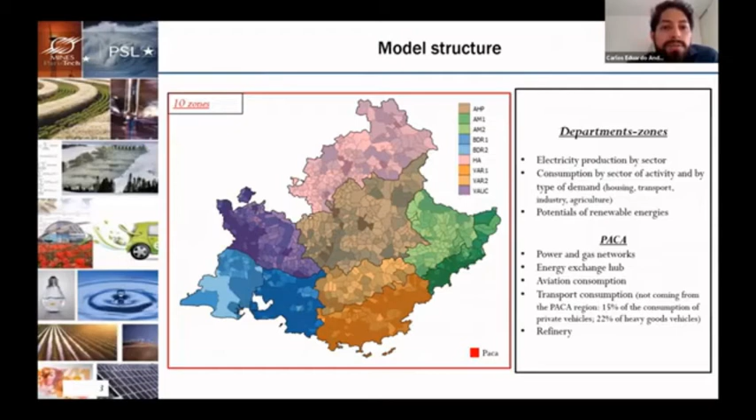Also, we want to represent in this region some of the demand on which the regional energy policy doesn't have a direct impact on its decarbonization, mainly for aviation, for refinery, and also for transport, as some of the vehicles consuming energy in the region come from the rest of France or from the rest of Europe.

In terms of production, the region only produces around 17% of the energy that it demands. This is highly concentrated in the high consuming zone of the Bouches-du-Rhône to produce electricity, mainly using natural gas, while in the rest of the departments hydro resources are used. To produce heat, biomass is mainly used.

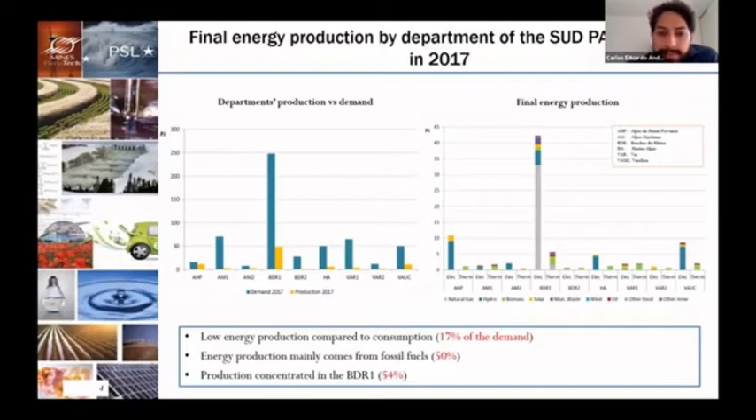The methodology we are using to analyze the energy system of the region is the TIMES methodology. TIMES stands for The Integrated MARKAL-EFOM System, which is a partial equilibrium model generator using a linear optimization paradigm, whose objective is to minimize the net present value, and looks to satisfy the final exogenous energy demand, respecting also the different constraints that the user can implement.

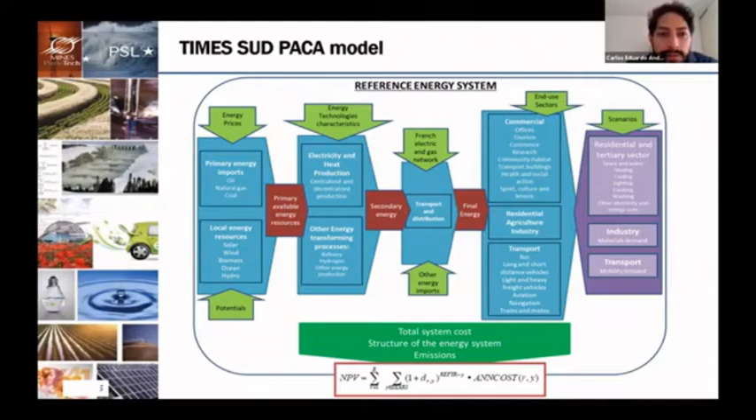Such as limiting emissions. In this way, the regional energy system details first the local available energy resources, how they are going to be transformed, then transported and distributed into the final energy sector, and how they are going to satisfy the final energy demand and service demand. It's important to say that the region is always interconnected with the French electric and gas network.

So what is the perspective of circular economy that we want to implement in the development of the regional energy system?

First, we can say that circular economy looks to dissociate economic growth from environmental degradation by redesigning the way of consuming and producing, and also by the application of the 4 Rs, mainly reduce, recycle, and recover, always seeking to minimize the consumption of resources and looking to produce zero waste, and also applying always a systemic approach.

In this way, a circular energy system will look to maximize the reuse of resources. It also will prioritize the recovery of resources in order to increase the efficiency of the system, reduce emissions, reuse products by giving them a second life, and integrating a shift in behavior in terms of how energy is consumed.

So here there is a list of the different resources that can be mobilized in terms of a circular energy system. First, we can recover some of the waste heat produced by industry, or we can recover heat by geothermal. Also, we can use the different wastes that are produced in the region, like municipal solid waste or agricultural waste. Also, we can rely on different renewable technologies.

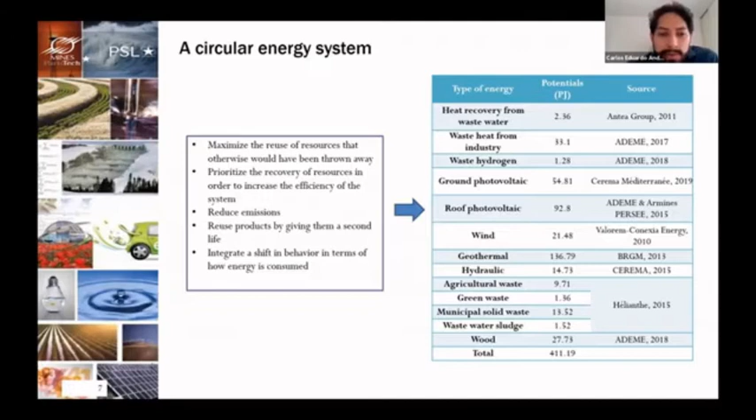So how these different potentials can be used? First, waste heat can be recovered through heat networks that will produce heat and water heating for the residential sector and heat for the industry sector.

Municipal solid waste can be gasified, and it can produce syngas, or green waste and agricultural waste can produce biogas through methanization, and this biogas and syngas can be either used directly to produce electricity or heat, or they can be purified to be injected into the network - they will produce CO2 and CH4, and this CH4 will be injected into the transport network.

This CO2 produced can be recovered and mixed with H2 that has been produced through electrolysis, and this mix will produce also CH4 that will be also injected into the gas network.

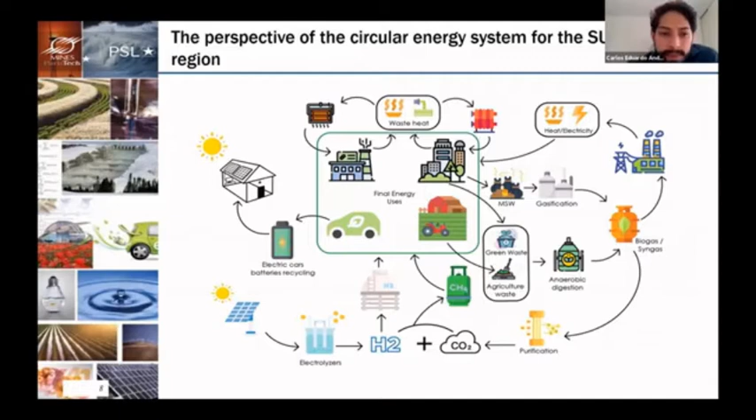Also, we want to recover electric car batteries to back up the electricity production from solar photovoltaic panels. So here are some of the characteristics and the technologies that are implemented into the model.

We are mainly using the works developed by the JRC and the ADEME, and from the thesis developed by Remy Doudard.

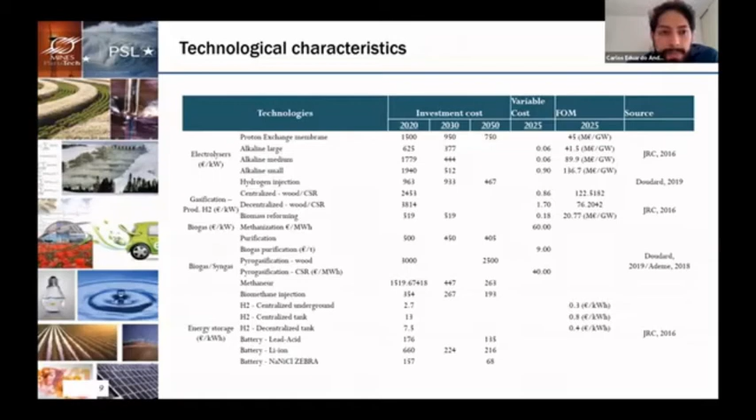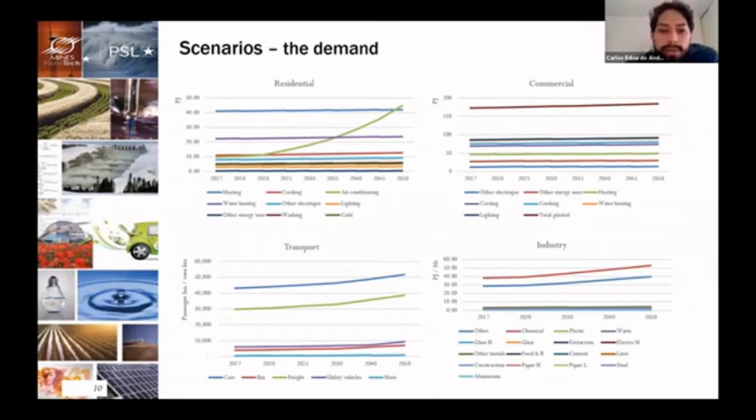So in terms of demand, we have projected the demand using different factors, different drivers. Mainly for the habitat sector, we have been using the evolution of population and also the construction of new buildings. For the transport sector, we are using the evolution mainly of mobility demand in terms of kilometers. And for industry, we are applying a 1% increase in industrial activity up to 2050.

So what are the scenarios that we are going to analyze today? First, the reference scenario, then the SRADDET scenario, and the circular economy scenario.

In the reference scenario, we want to explore how the evolution of the energy system is going to be transformed according to applying past trends and also taking account some of the policies that have been applied by the region recently, mainly through the regional climate plan.

The SRADDET scenario - SRADDET is the regional document where the region establishes the different policies for the development of its territory. So in this document, it is included the different policies for the development of the energy system. So we want to analyze how these policies are going to shift the development of the energy system of the region.

And finally, the circular economy scenario, which tries to evaluate how integrating a circular economy perspective can shift the development of the energy system of the Sud-Paca region.

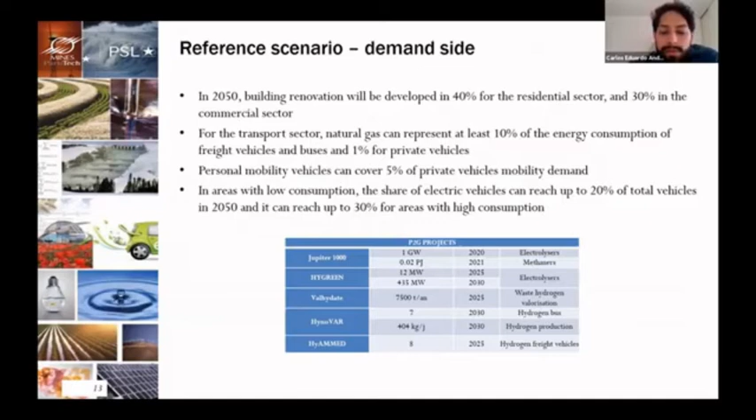And also we are applying here the power to gas projects that have been established and planned in the region. So for the SRADDET scenario, the main assumptions for the energy production side are detailed in this table.

And we establish some similar assumptions with respect to the reference scenario, with addition of a decrease in the electricity coming from the French network in 50%. And also there is not going to be the development of new fossil power plants.

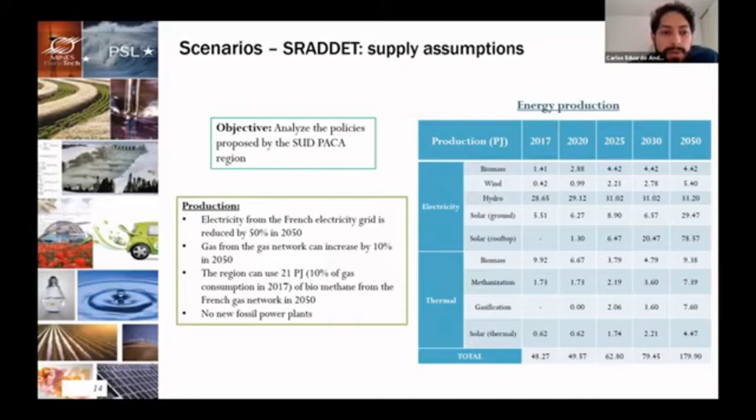So other hypotheses that we are implementing are mainly using 100% of the building renovation potentials. Also, bicycles can cover up to 15% of cars' mobility demand, and buses can cover 5% of that demand as well. And we have a shift in the number of people per vehicle, passing from 1.2 to 1.35 people per car from 2030.

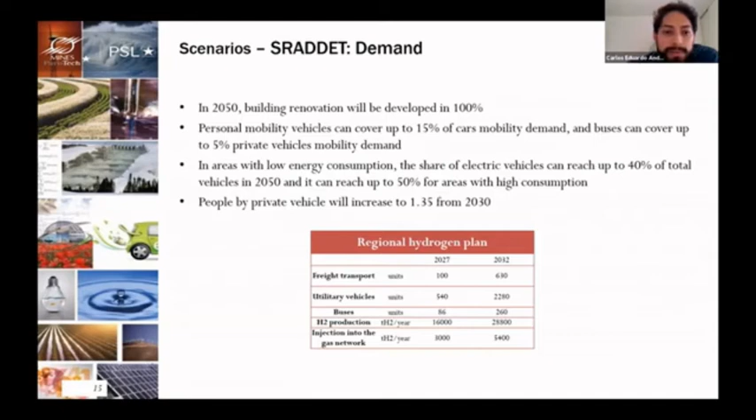And we are also integrating the regional hydrogen plan. And finally, for the circular energy system, we want to mobilize 100% of waste heat from industry and wastewater heat. We want to use 100% of the potentials from sludge, and also use 100% of the potentials of the different waste present in the region. Also building renovations to 100%, and we want to develop 15% of carbon capture and usage of CO2.

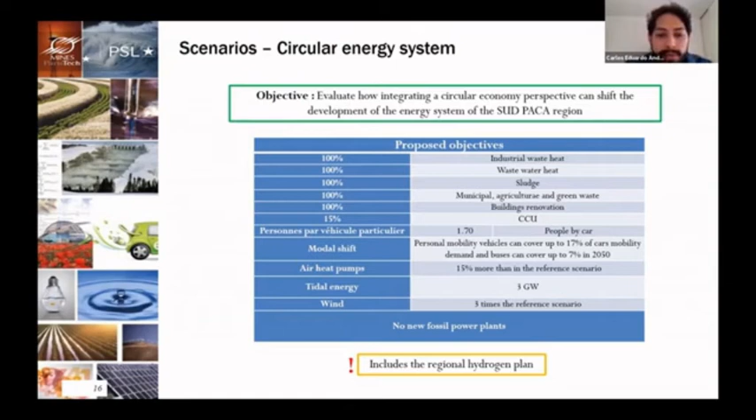So here there is going to be a shift in the number of people per vehicle from 1.2 to 1.7 in 2050, and bicycles can cover up to 17% of mobility demand, and buses can cover up to 7%. Also, there is going to be a more important development of air heat pumps, and also a greater development of wind energy and development of tidal energy. We also include in this scenario the regional hydrogen plan.

So some results: in the reference scenario, we can see that there is still a use of fossil fuels, but in the other two scenarios, there is almost zero use of fossil fuels. So in the reference scenario, the use of fossil fuels has been reduced by 11%. And the most important development for the electric sector is seen in the SRADDET scenario, mainly by the development of climate-dependent technologies. But this development hasn't reached 100% of the objectives established in the region. They have reached just 50% of these objectives. And we can see that the development of solar and wind technology has reduced the use of hydro resources in this scenario.

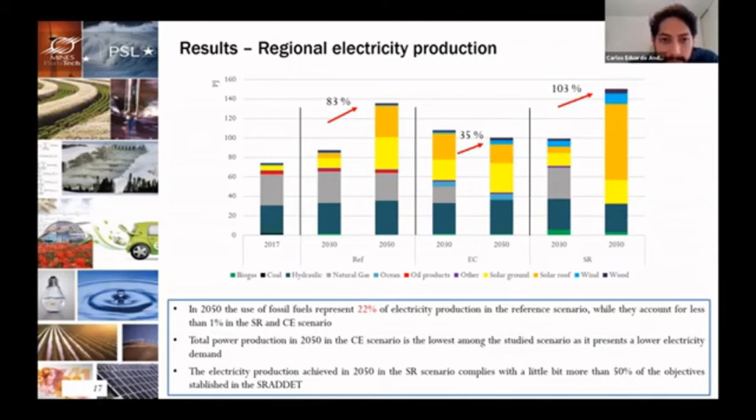Okay, so also we can see that when wind technologies are available to be developed, they are developed as much as possible, and this applies also to the tidal energy that has been developed in the circular economy scenario. In terms of the production for each of the zones, you can see that in the reference and in the SRADDET scenario, the production is still concentrated in the high consuming zone of the Bouches-du-Rhône, and in the circular economy scenario, there is a more distributed production among the different zones.

So hydro resources in all three scenarios have been developed mostly in the Vaucluse department, and wind energy in the SRADDET scenario is developed mainly in the high consuming zone of the Bouches-du-Rhône, and also in the high consuming zone of the Alpes-Maritimes. And tidal energy in the circular economy scenario has been developed mainly in the high consuming zone of the Var, and also a little bit in the high consuming zones of the Bouches-du-Rhône and the Alpes-Maritimes.

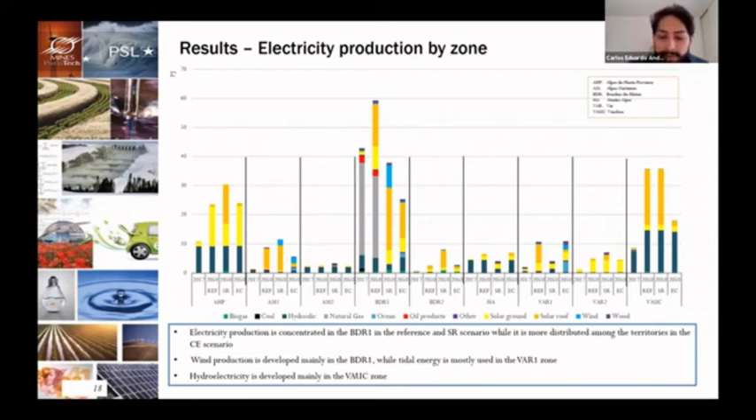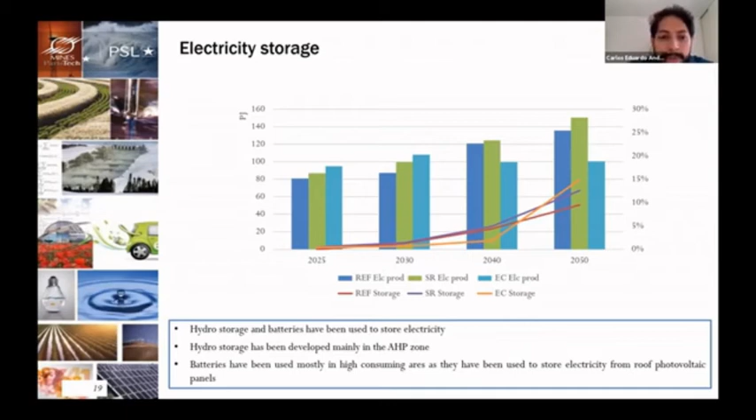So there has been a use of electricity storage in all three scenarios, but the most important use of storage is in the circular economy scenario, where a greater part of the production has been stored. This storage has used mainly batteries, which have been developed mainly in high consuming zones, but also there has been a use of hydro storage, and this hydro storage has been developed mainly in the Alpes-de-Haute-Provence zone.

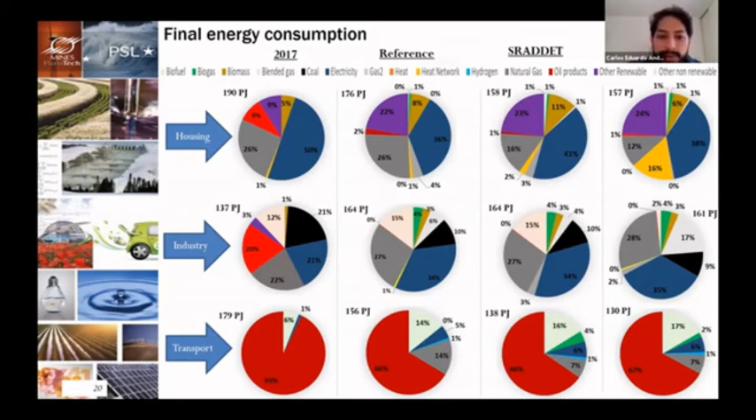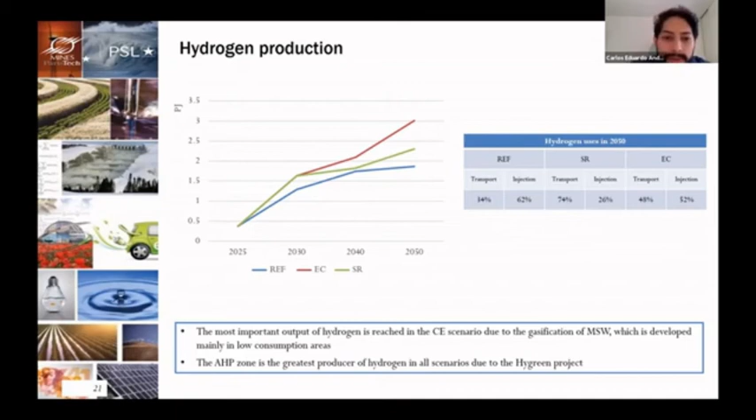So how has hydrogen been produced? First, the most important production of hydrogen has been in the circular economy scenario, mainly from the gasification of municipal solid waste. And the greatest producer of hydrogen is the Alpes de Haute-Provence, because the HyGreen project is going to be developed in this territory. And finally, CO2 emissions have been reduced the most in the circular economy scenario, mainly by the recovery of waste heat for the residential uses.

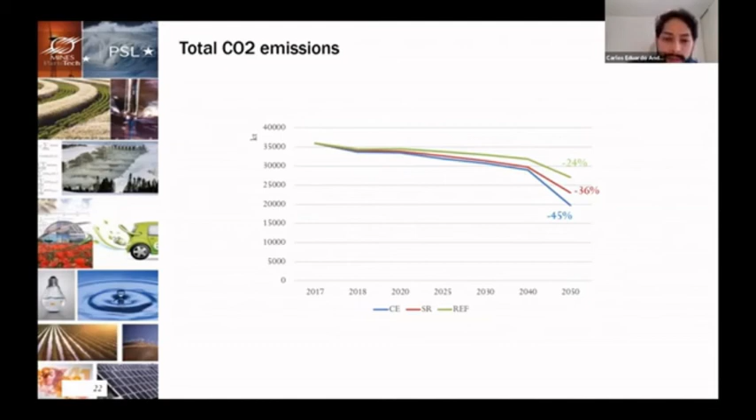So in conclusion, the region is on the path towards the decarbonization of its energy system with the decrease of fossil fuels consumption and the development of clean technologies. The recovery of waste heat should be prioritized as it has proven to have a great potential to decarbonize the habitat sector, increasing also the efficiency of the whole system. The use of batteries to store roof photovoltaic production is key to allow a greater development of this technology.

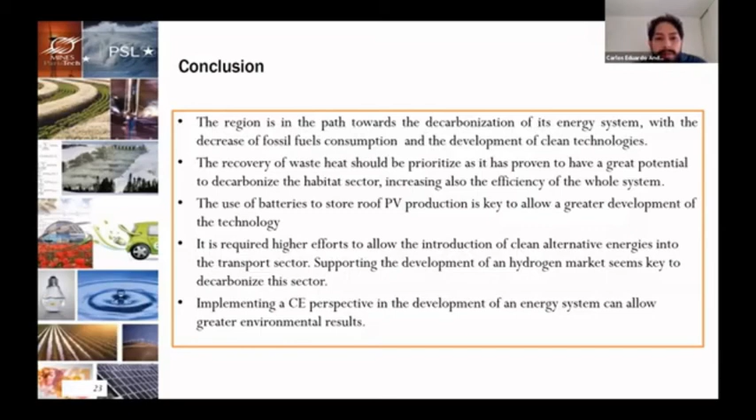Also, higher efforts will be required to allow the introduction of clean alternative energies into the transport sector. So hydrogen seems to be key to decarbonize this sector. And implementing a circular economy perspective in the development of an energy system can allow greater environmental results.